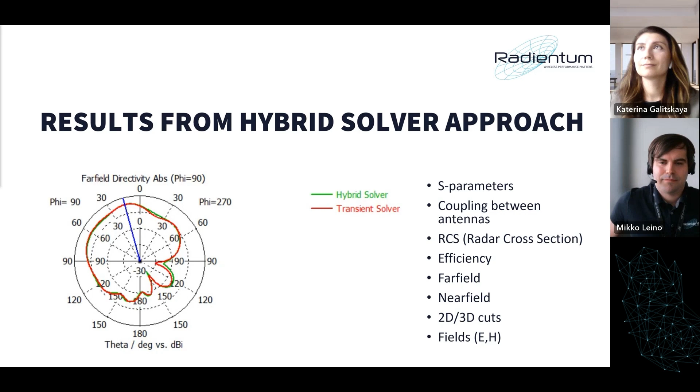Thanks, Kate. Hopefully you can hear me? Yes. Great.

So hello everyone, also from my behalf. I'm Mikko Leino, also senior antenna engineer here in Radientum, and I will talk briefly about UWB antennas in automotive applications. UWB stands for ultra wideband antennas, and how they are used in automotive applications.

UWB is quite an emerging technology in automotive at the moment, and one of the key areas where it is used is radar functionality. One of the main use cases for UWB is life detection in radar, and the UWB radars work at comparatively low frequencies, around 6 to 8 gigahertz, low compared to the millimeter waves that Kate is going to discuss a bit later.

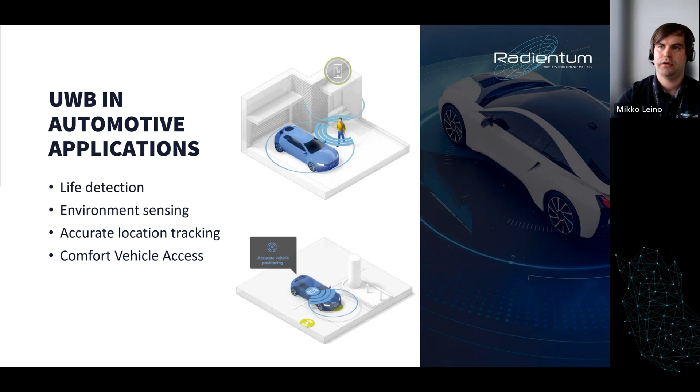Yeah, and about the... okay, now able to change the...

About the examples I'm showing today, where we have done these life detection sensor simulations inside the car. In these simulations we used only one UWB sensor, placed inside the car in 2 different locations, and we also have 2 human models present within the car.

Typically, you are going to have more UWB sensors in your systems, but with the simulations we can get the idea how many of those you actually need, and also what is the best possible location. These simulations have been done using the hybrid solver, as Kate already explained. And now if we look at the results we are getting,

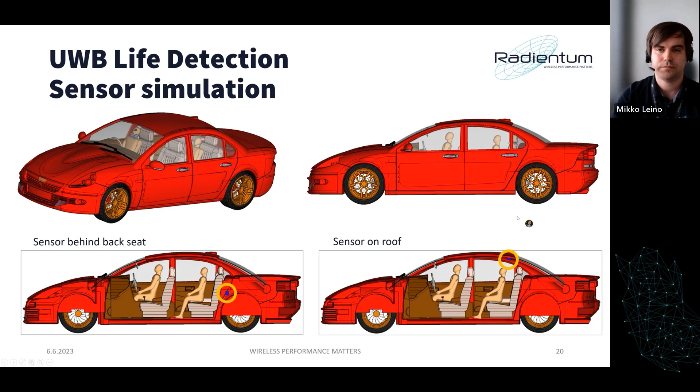when we have the sensor behind the back seat, here you can see the electric fields radiating when there are humans inside and when they are not inside. So a bit different, different responses. Oops. Sorry for skipping a bit ahead.

Then we also have the case when we have the sensor on the rooftop. The fields are quite different, and from these fields you can get the idea where you might get the reflections in the car. But as you see in these two simulations, the fields give you the idea how the sensors are radiating within the car, but are those the best possible locations for them? Just looking at the electric fields, it's not very useful.

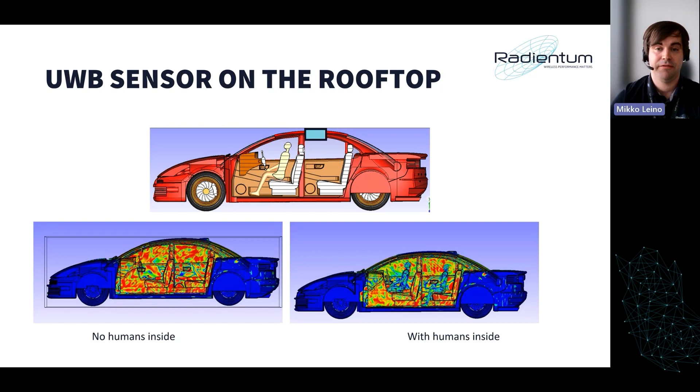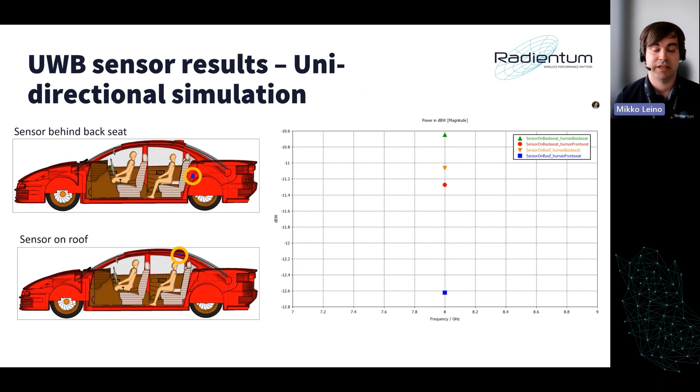If you use the unidirectional simulation, simulating only once, so that your source, the UWB sensor, illuminates your target space, inside a car in this example, you can quickly get the idea how different people are seen within the car. In the graph here I'm showing how the different sensors see the different people, and we have recorded the losses with those persons. Higher losses mean that we are seeing that person slightly better than the other ones.

From these results, we can see that when the sensor is on the back seat, we are having higher losses within the persons, meaning we are seeing them better. Compared to that, with the sensor on the rooftop we are getting a slightly worse response, meaning that the sensor location on the roof is not the best possible in this case.

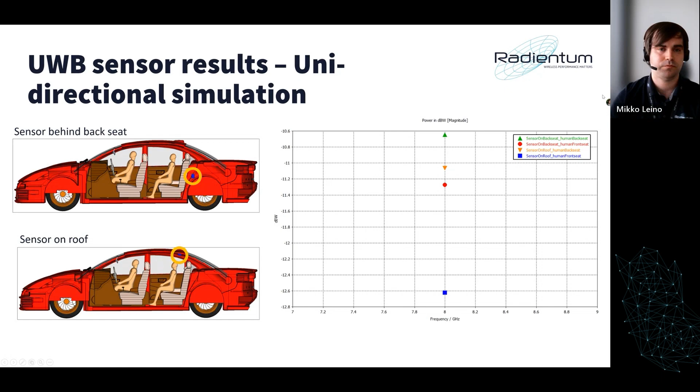And also, understandably, the human on the back seat is in both cases seen better than the one on the front seat, because they are located closer to the sensor. But this is with the unidirectional solver.

Then with the bidirectional simulation, where it becomes useful is to get the signal back to the sensor. Here we have done a quite quick simulation, just showing how it might be done. The sensor on the roof is illuminating the insides of the car,

We can also get the correct distance between the human and the sensor, so it's quite useful for detecting objects with the simulations. You can remove them later on and see, for example, if they are causing big reflections in your simulation model, but also get the idea how your sensor might work in the correct environment.